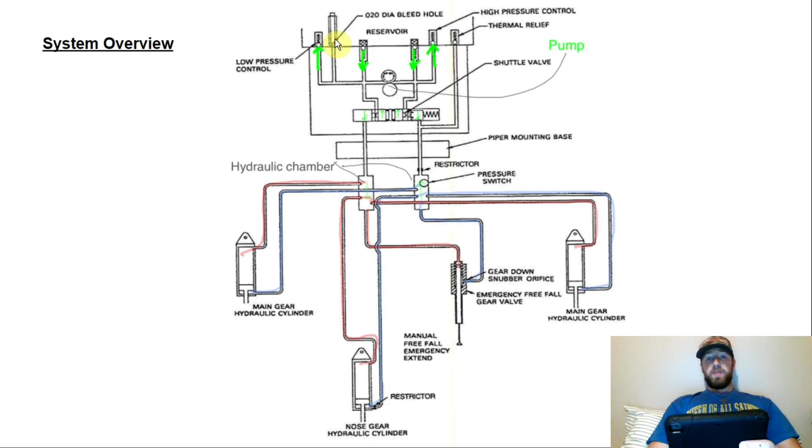Then we have our bleed hole up here at the top. The bleed hole is here in case there's any condensation or anything that builds up in the system, allowing it to leak out of the system into here.

We have our thermal relief. If there needs to be some expansion due to heat, it's going to be able to go back into this thermal relief and back into the reservoir, so it doesn't build up a dangerous amount of pressure in these hydraulic lines. Here in the middle we have our pump.

This provides the pressure for the system. Then we have the pump, and note that this is electrically driven. So if we have some sort of electrical failure, this electrically driven hydraulic pump is not on the emergency battery bus, so we will lose this if we lose battery power and our alternators. That's why we have the emergency freefall gear system, which I'll get into later.

Moving on down here, we have our shuttle valve. This thing will move left and right depending on where the cockpit control switch is. There's a switch in the cockpit right next to the throttle quadrant on the pilot side. It's a little black, looks like a tire almost.

It's a little black tire, and you pull it out and bring it up to bring the gear up, pull it out and bring it down to bring the gear down. So depending on where that is, that'll control how the shuttle valve moves.

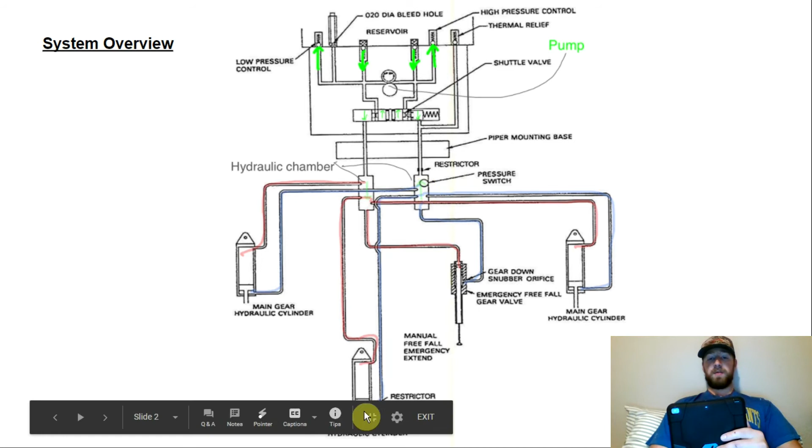And if we look on the right one here, this one is plumbed to the bottom of the hydraulic cylinders. So again, this hydraulic chamber feeds hydraulic fluid into the top of the gear cylinders, and this one on the right feeds hydraulic fluid into the bottom of the gear cylinders.

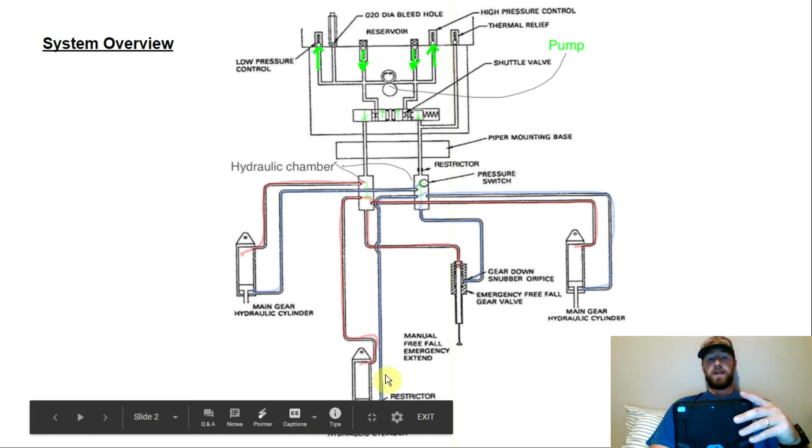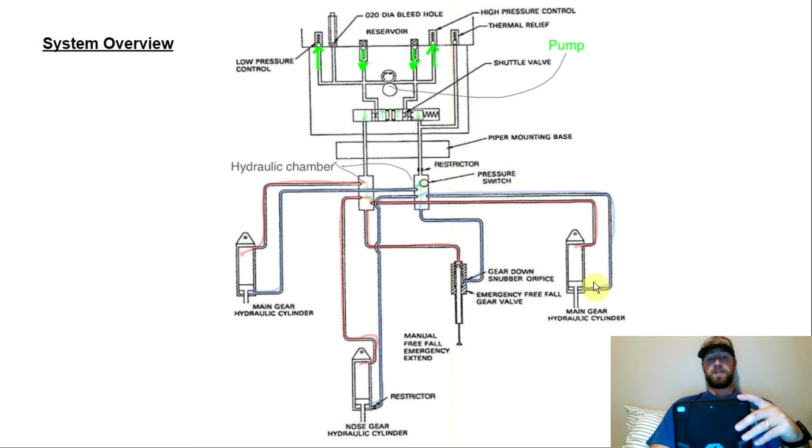Let me make sure I'm not missing anything. Also not noted on this diagram, but I think it's in my presentation later: there's going to be a spring for each of these three gear apparatus that helps bring it into the downlock position. There are downlock hooks for each of these three. Then there's up limit, down limit switches, and squat switches on the two main gear. That's another part of the system there.

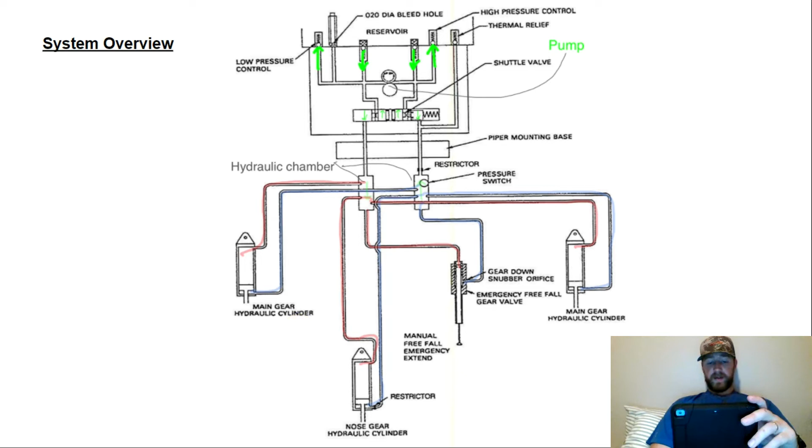Let me just make sure I'm not missing anything. Alright, very good. So that's an overview of the components of the system.

Now we'll go into some of the indications we'll get in the cockpit on our G1000. Starting up here at the top left, if the gear is down and locked, we'll see 3 green circles in the cockpit, and again, this is going to be found on the PFD.

To the right here, if our landing gear is up, we'll have these white circles with the empty or black inside of them. Lower left, if the landing gear is moving either up or down, we're going to have squares with the hash marks. And then over to the right here, if there's some sort of failure in the system, we're going to get this red.

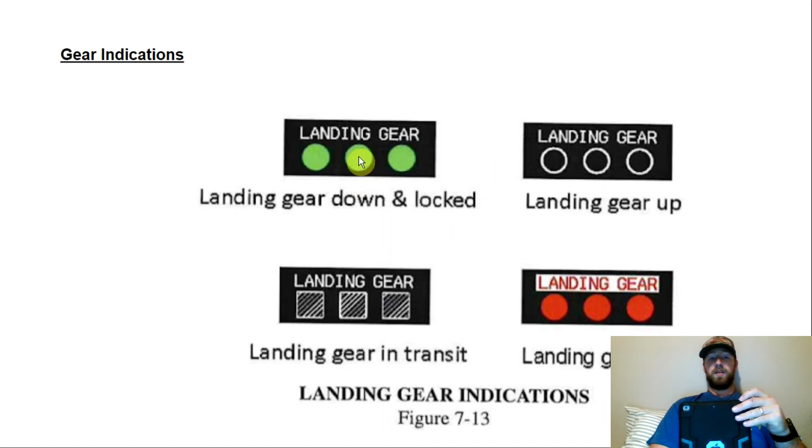So when we're coming into land, we want to do gear checks. We're looking for 3 green, no red, 1 in the mirror. So those are your 3 things: you're checking 3 green, you say no red, and then 1 in the mirror.

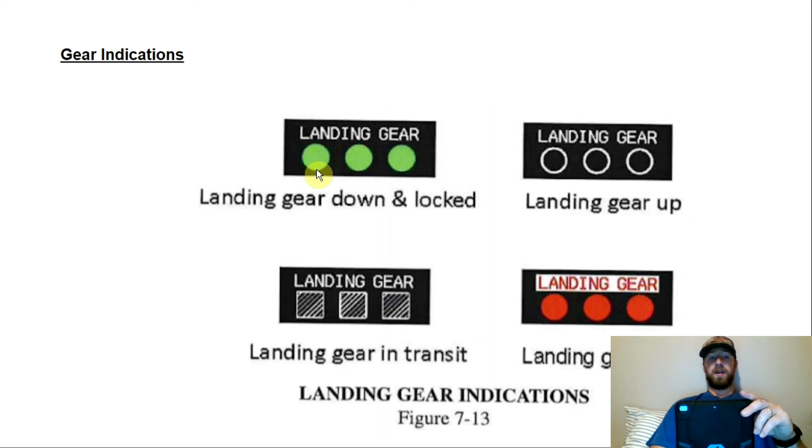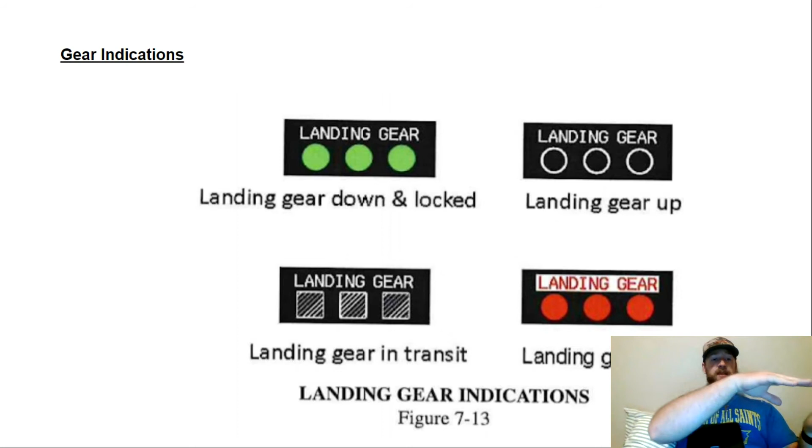And again, there's going to be a mirror on the left nacelle. It's a pretty small mirror, probably the size of maybe a baseball in diameter, located right on the left nacelle there, so you could see that front nose gear if it's down. It can be kind of difficult at night, so you may need to bank the plane a little bit and look for the movement of the white strut. But during the day, it's really easy to see that nose gear in that mirror.

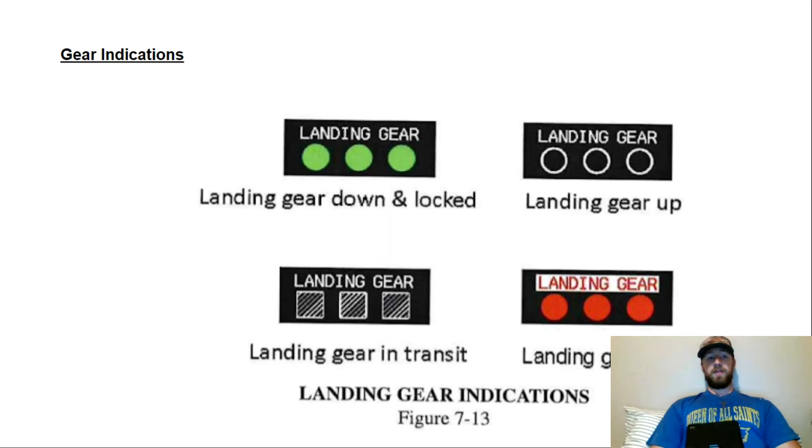So again, 3 green, no red, 1 in the mirror, gears down. And if you're working in a crew environment, you'd say verify, and then your co-pilot would look at 3 green, yep, no red, and yep, 1 in the mirror, gear down, verified.

Alright, let's look at the electrical system that's tied into the landing gear. So we have the G1000 that it's all feeding to. We have the right squat switch. Squat - pretty easy to memorize this. Think about squatting. So if the airplane is on the ground, it's not going anywhere, it's parked, it's kind of squatting. It's kind of weird to think about, but that's kind of what it's doing.

It's just squatting there. So these squat switches - let's see here, we've got 1 on the right and 1 on the left. Yep, that's it. So only 2 squat switches, and what these do is they don't allow the gear to transit up while the gear is down, or while the plane is on the ground.

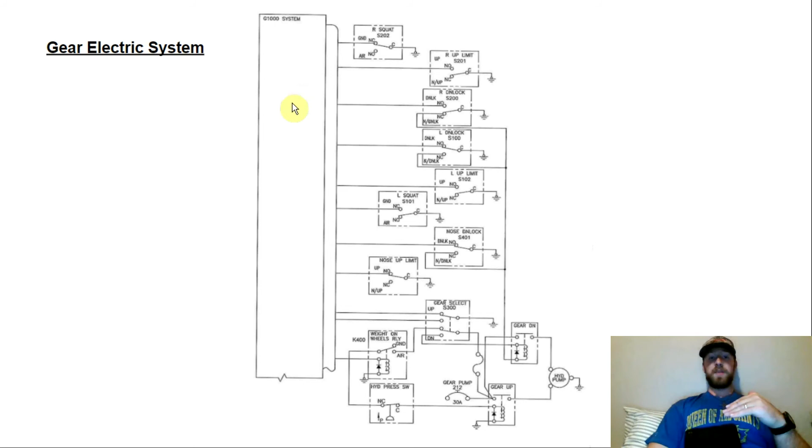So while there's pressure on that squat switch - the landing gear has the struts, and while it's on the ground, the weight of the airplane is pushing down on those struts, compresses it to the point where the squat switch will contact, that closes the circuit, feeds the information to the G1000 that the airplane is on the ground, and to not activate the hydraulic pump to bring that gear up or cycle that gear up. So that's a squat switch - again, 1 on the right and 1 on the left.

We have the up limit switches. So when the gear is coming up, it'll hit this up limit switch, that'll close the circuit, and it'll run through the G1000, and then we'll have the hydraulic pump turn off. It'll also give us that cockpit indication that the gear is up. So again, we have an up limit on the right - you can see R up limit. We have a L up limit, and then we have a nose up limit. So up limit switches on all 3 of the gear.

Then we have R, D, N lock - right down lock. So this would mean that the gear is down and the down lock hooks are in. Again, it's the same thing - there's a down limit switch. So once it's fully extended, there's going to be a contactor that connects, closes the circuit, feeds the information to the G1000, and again the hydraulic pump will turn off, and we'll have our gear down.

So again, we have a right down lock, we have a left down lock, and then we have a nose down lock as well.

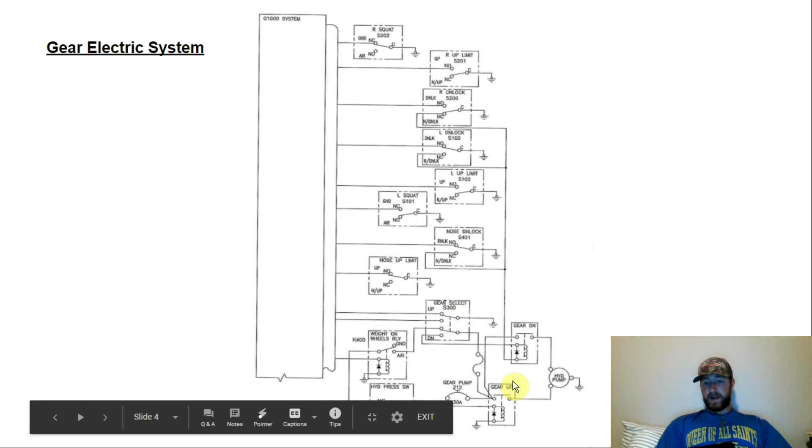Like I talked about, we have the gear selector in the cockpit. That's about all I want to talk about here. And then we can see the hydraulic pump here. That's pretty good.

Alright, what are we going on to? Raising the gear. So the first thing we're going to do when we're raising the gear is grab that cockpit control, pull it out, and bring it up into the up position. That hydraulic pump will engage.

The shuttle valve is going to move to the left here, and it's going to allow this high pressure fluid through, because the pump is running, this hydraulic fluid will be pressurized. One thing while we're talking about this, don't think about a high pressure and a low pressure side. Both of these lines have a lot of pressure in them. It's like 1700 psi and then 1300 psi.

So it's not like when you start raising the gear - and I have it marked here in blue, that would be the relatively higher pressure side - it's not like there's zero pressure here on the left and it's just kind of trickling out. No, it's 1300 psi of pressure, which is quite a bit, which we'll get into later why that's a big deal. But it's something that when you're going through an oral with someone, or explaining the system to an instructor or a check ride examiner down the road, you don't want to say high pressure and low pressure, because there's really no such thing as low pressure in the system unless there's some sort of failure and the fluid has drained out of it. It's relatively high pressure and relatively low pressure, because both of these are pretty high pressure.

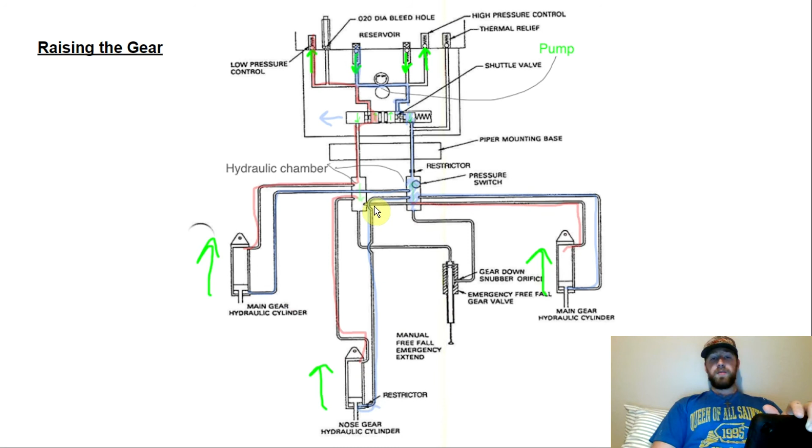So it's pushing the hydraulic fluid back up through these lines into the hydraulic chamber, back up through the shuttle valve. Again, this shuttle valve is moved, so this is allowed up through this left middle chamber, or the second chamber, or canal. So it goes up through here, and then goes right back into the reservoir.

The gear's coming up. It's going to hit that up limit switch, this pressure switch - well, it should be at 1700. So it's going to hit that up limit switch, and the hydraulic pump will turn off. We won't have the 3 green indication if we're bringing the gear up, we'll have this indication. And there you go - so you've just raised your gear.

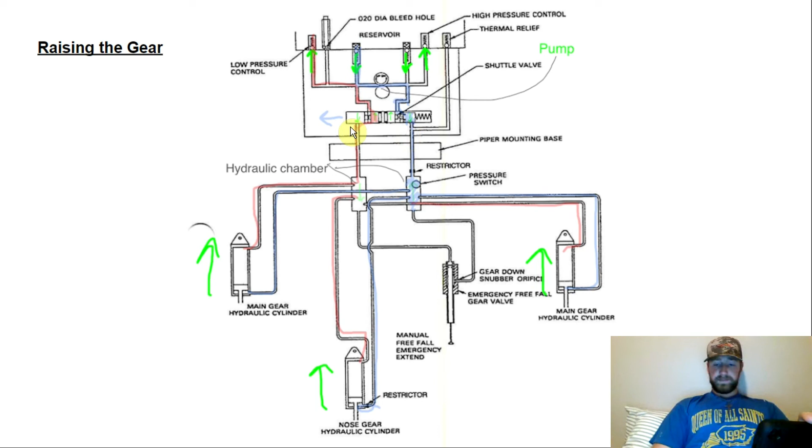Alright, now let's talk about lowering the gear. So lowering the gear, again, it's going to start off in the same place. You're going to take that cockpit control right next to the throttle quadrant on the pilot side, and bring that down. Once you bring that down, this hydraulic pump is going to engage.

Hydraulic fluid is going to be drawn out of this right line right here, pressurized in the pump. This shuttle valve is going to move to the right this time. This high pressure fluid is going to be allowed to go through this far left canal or opening into the left hydraulic chamber. And again, if we remember, the left hydraulic chamber has lines connecting to the tops of these hydraulic gear cylinder heads.

Okay, so it's going to go into the top of these heads simultaneously into these three. 1700 psi going into the top. We only have 1300 psi in the bottom, so what's going to happen? It's going to push this piston down. As it pushes it down, we're going to have the fluid drain or be pushed out the bottoms of these cylinders and into this right hydraulic chamber, up through this hydraulic line here, up through the right middle canal in the shuttle valve, and back up into the reservoir.

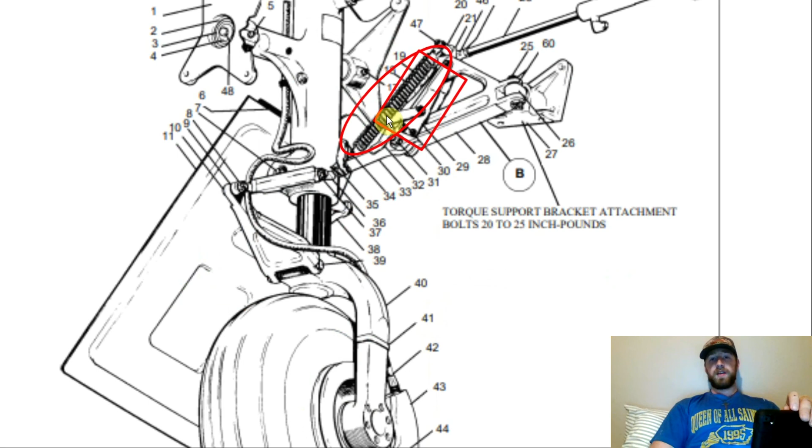The down lock, how the gear locks into place when you bring it down, is there's a spring that engages. It's a pretty thick gauge spring. I think I have a diagram of where it is. Yep, so this spring right here helps bring the gear into the down lock position, and then we have down lock hooks right here that lock it in place. So those hooks bring it down.

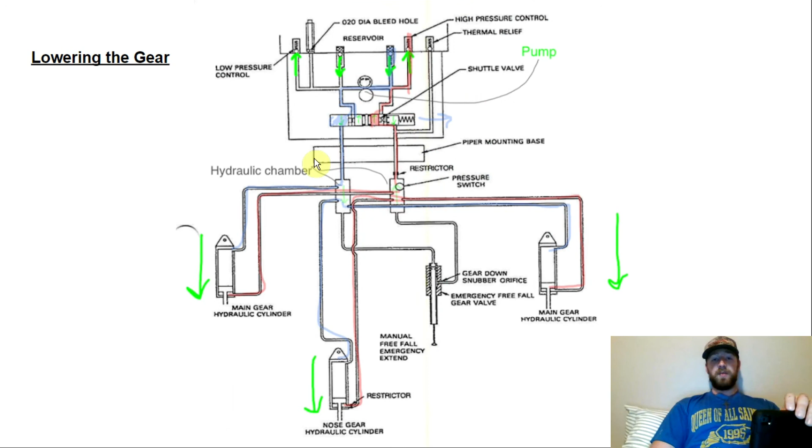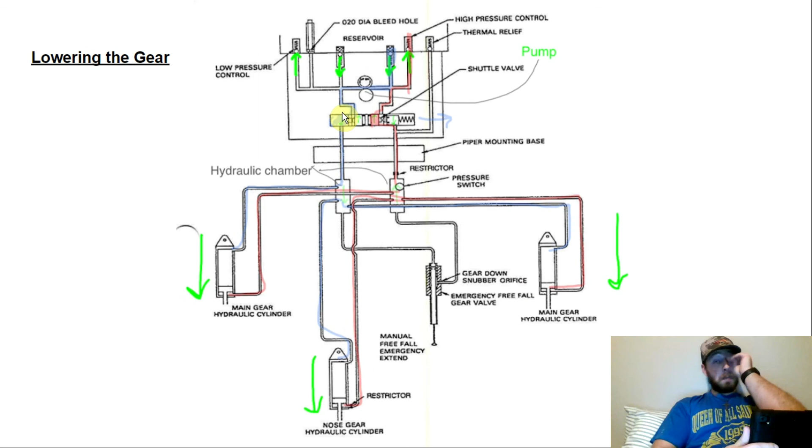Then we have the down lock limit switches, which feed information to the G1000, giving us our cockpit indication that the landing gear is down and locked, 3 green. And then the hydraulic pump turns off, and what do you know? You've lowered your gear.

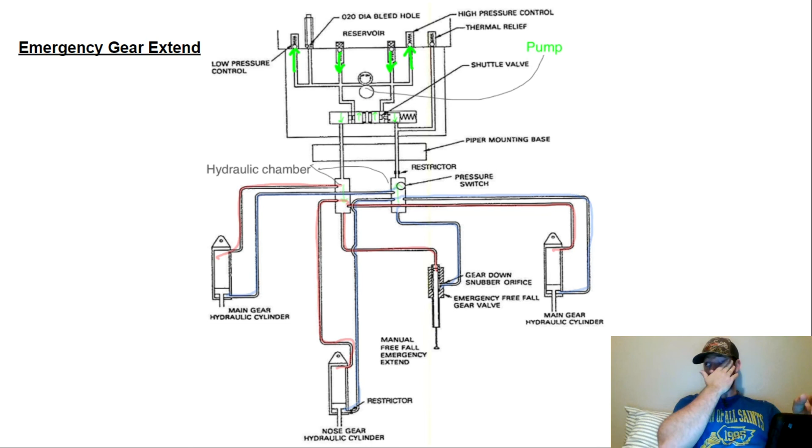Alright, now let's talk about emergency gear extend. Imagine you had a scenario where you lost your alternators and you had to get to an airport that was decently far away, so you've drained your main battery and you're running off of the emergency battery. Only your emergency battery bus is getting energy or current, and unfortunately, or fortunately, this hydraulic pump here isn't on that bus. So we're not going to be able to lower the gear normally.

So we need some way to do it manually. Some airplanes will actually have a pump, like one of those high-wing Cessnas—182, I think? Maybe, I don't know, 180, I don't know what it is—but they'll actually have a hand pump, and you could bring the gear down that way. We don't have that in the Seminole.

So we have this emergency free fall gear valve. Alright, so how this works: in this scenario, the gear is going to be up, right, because we're trying to extend it. So if the gear is up, that means that we have relatively higher pressure holding the gear up, and so the bottoms of these cylinders are going to be full of that, like 1700 psi pressure, and then we'll have 1300 in these lines up above.

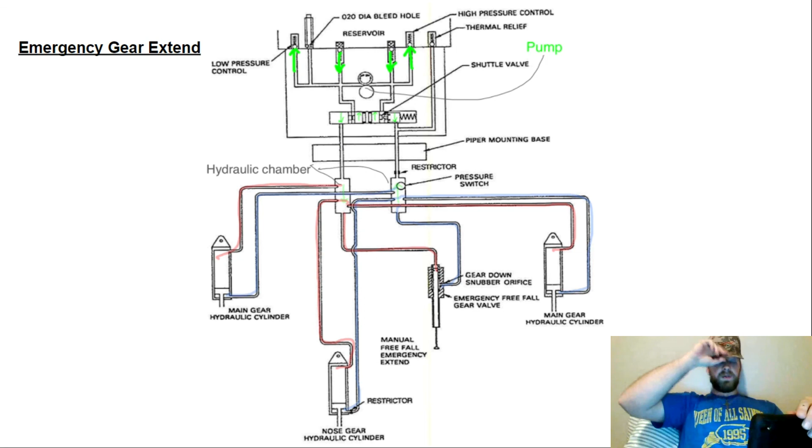Now, something that we should be aware of is that if we're really hauling, right, if we're going like 160, the airflow beneath those tires may be so great that there's so much resistance that the gear may not actually come down. So you may want to slow down enough to where that air resistance underneath the wing is less, so the gear can actually overcome that pressure and fall down.

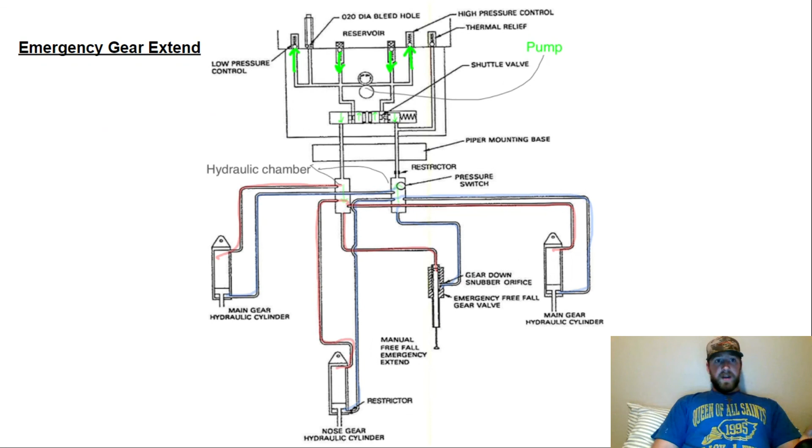I think that's all I got for you guys. Sources was just the Piper Seminole AFM there—so back there in section, what would it be, 6? Section 6, and then I believe 8 as well.